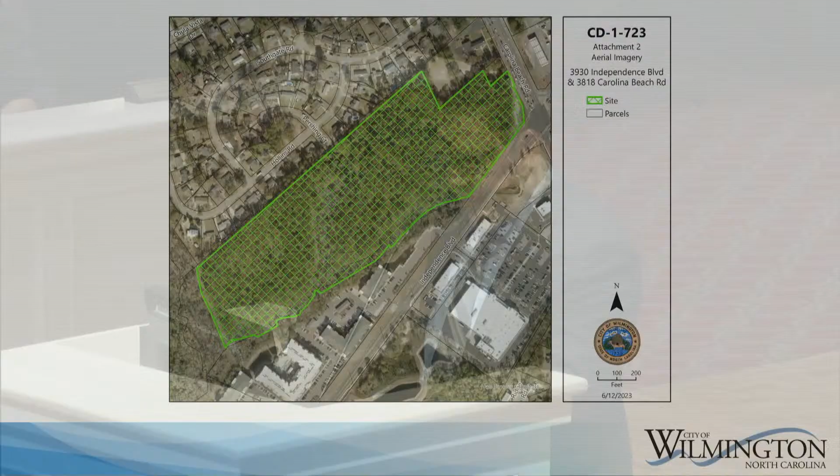Good evening, members of council. This site is located on the north side of Independence Boulevard at its intersection with Carolina Beach Road. It's approximately 23 acres in size and it's currently vacant.

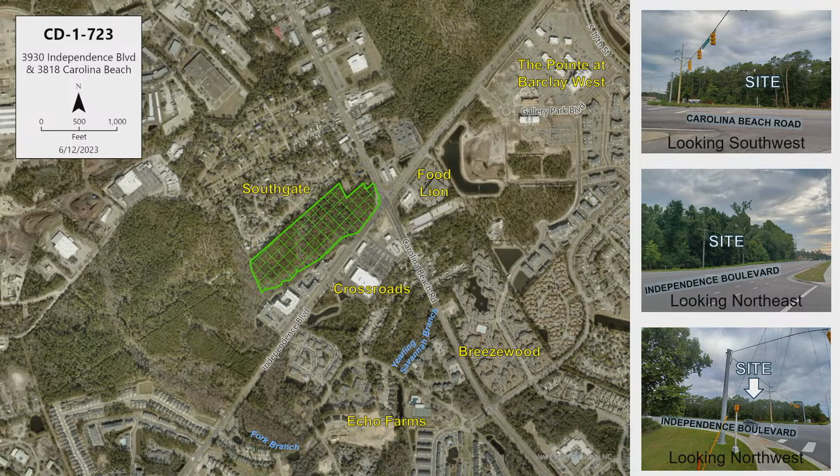The site is surrounded by residential and commercial zoning. A single dwelling neighborhood is located to the north. Multiple dwelling apartments are located directly south, and as I stated, the Crossroads Center is located to the south across Independence Boulevard.

The applicant is proposing to rezone this property to an MD 17 multiple dwelling conditional district for a 257-unit residential development. The project includes 242 apartments located in 5 four-story buildings and 15 townhomes located in 5 two-story buildings. The applicant proposes to construct a new residential collector street off of Independence Boulevard to provide access to the site. The proposal also includes a secondary access on Carolina Beach Road.

Traffic data indicates there would be an increase in estimated vehicle trips compared to the maximum density allowed under current zoning. Based on the estimated trip generation, a traffic impact analysis was required. The improvements agreed upon as part of that process include right-in, right-out driveways at access number 1 and number 2, a westbound right turn lane on Independence Boulevard at access number 1, and upgrading Independence Boulevard to accommodate a safe U-turn movement.

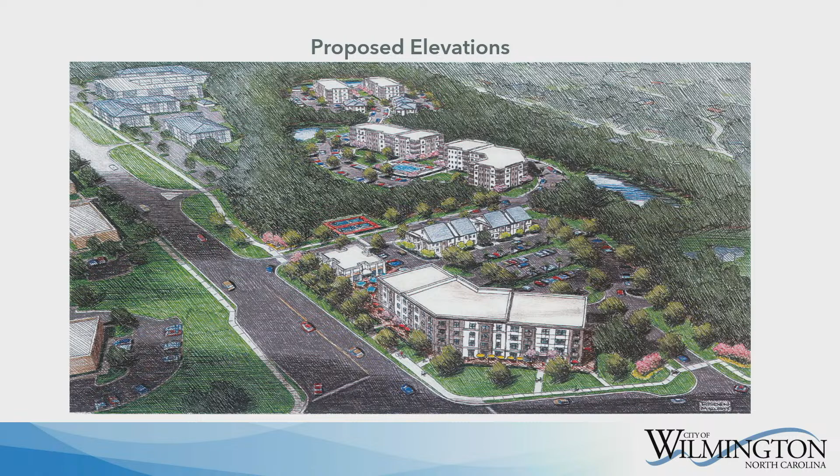The site is located within a greenfield sites as multi-use places area of opportunity. It's located along one of our high-capacity transit routes.

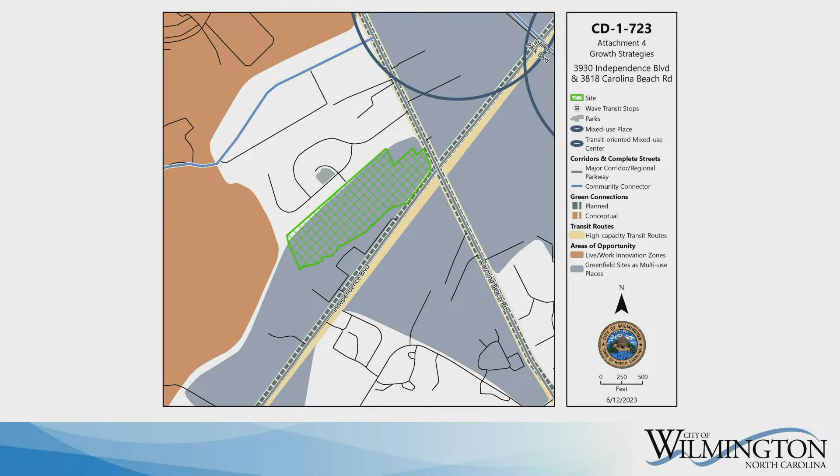The comprehensive plan calls for infill development that maintains and enhances the desired character and increases housing options. The plan calls for new residential development to set aside usable open space that preserves natural landscapes and high-quality ecological resources. And the plan calls for increased density along our transit routes and near commercial services.

This proposed rezoning would allow for quality infill development that is compatible. It provides an increase in density near our services and along the identified transit route and preserves a significant amount of natural area. Staff believes this request is consistent with our comprehensive plan and is reasonable in the public interest, and we are recommending conditional approval.

At the Planning Commission meeting, they voted unanimously to recommend approval of this request. I'd be happy to answer any questions, and I believe the applicant is prepared to make a presentation as well.

Are there any questions for staff? Yes, Mr. Anderson. Brian, couple questions. I guess I'll go short first.

The stub-out thing from the other neighborhood, seems like we've been doing those for a while in different neighborhoods, commercial, different places for later. That bothers me because if we're not going to use them... so why does this one have some issues with wetlands?

Is that the main issue? Well, there is a significant wetland, a significant stream on that side of the property, but the most important thing here is there's a private property located between this site and the neighborhood that cannot be crossed without that owner's approval. They don't have direct access to that stub.

So that line there, those two lines, is that some kind of easement? It's a fee simple parcel. You can kind of see it there between the green and the black lines. Okay, got that.

Can you tell me what improvements to the intersection the applicant is proposing to make? There'll be this U-turn, I guess kind of like a bulb there to make it easier, is that kind of it?

Right now, they're looking at a widening of Independence to accommodate a U-turn at the left turn at the entrance to the crossroads. There's a driveway, the second access to the crossroads, and then there's a driveway to the apartment complex to the north, so that at that intersection is where the widening would occur, and the U-turn movement would be accommodated.

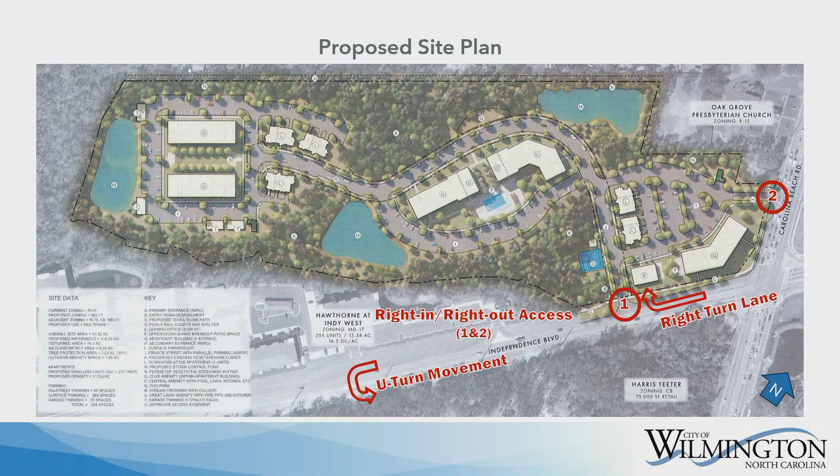And is that advisable without a light, to have all those movements? You're creating an intersection with four directions, right? Yes. And we're just going to have U-turns in the middle of that without any kind of light? There'll be a yield condition, I think. Long-term, we'd like to see a signal there, but I'd have to defer to engineering on those improvements.

Okay, and they're making no improvements to the intersection itself, is that right? Other than widening it and readjusting the left turn to make that U-turn movement. No, I'm talking about up at the main intersection, at Independence and Carolina Beach Road. I believe the pedestrian crosswalks are the improvements they're making there.

They're making one? We have a condition for one, but I think there might be multiple in the TIA that's under review. Okay, and that'll be presented by the TIA by whom? We can confirm that. The city's traffic engineer is here this evening, and the applicant will be able to speak to that as well.

This has been on our radar for some time, and it's real high on our radar now. We've been talking about it a lot lately, what we're going to do with Independence long-term.

Are the trail and the sidewalks that they're building, are they built to accommodate that future improvement, or is it something where it'd just be ripped up? No, they're being located on the edge of the right-of-way to allow for the future improvement to occur.

Okay, same for coming off Carolina Beach. It seems like if you were taking a right, you'd anticipate a right turn lane there at some point, is that? There's a pinch point there at Carolina Beach Road because of those large power poles, so there's not a lot you can do as far as a right turn off of Carolina Beach Road.

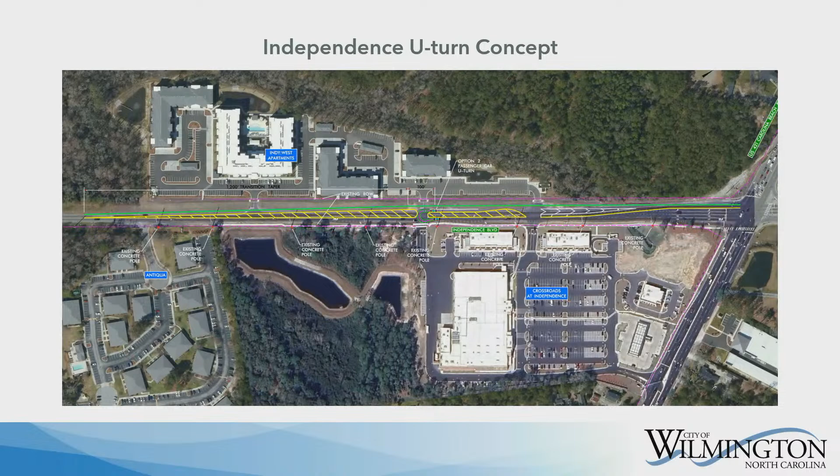Brian, you may have gone over this already. Where's the widening occurring? You said they were widening, it's a right turn and the U-turn? Yeah, I have a slide. This is very preliminary. I can't speak to how this will actually be designed in the end. This is what's being discussed right now for that improvement. Again, this will change, this is just a sketch up to see how it would work. It still has to be finalized through design, but that's generally what it would look like.

Okay, one last thing, I asked you this morning, but the in and out on the right turn in, right turn out onto Independence, you will not be able to take a left there, is that correct? The city, we're going to see to that, is that right? There's going to be a concrete divider as you come out that forces you right. I don't know that it's been determined what will be in the median itself to not allow that to occur, but if that's a condition you'd like to see, then we can make sure there's paddles or some kind of raised median in that location.

Well, I hate paddles, but this reminds me, there's some, you know, at Oleander and Independence there's offices where people try to take a left across the traffic, and it creates wrecks, it creates all kinds of backups. I wish it were somewhere else altogether, further from the intersection, but that close to the intersection, just because it has that V doesn't mean anything. They're going to still take a left. So I'll let the whole board decide if that's a condition, but it's just a question I wanted to ask.

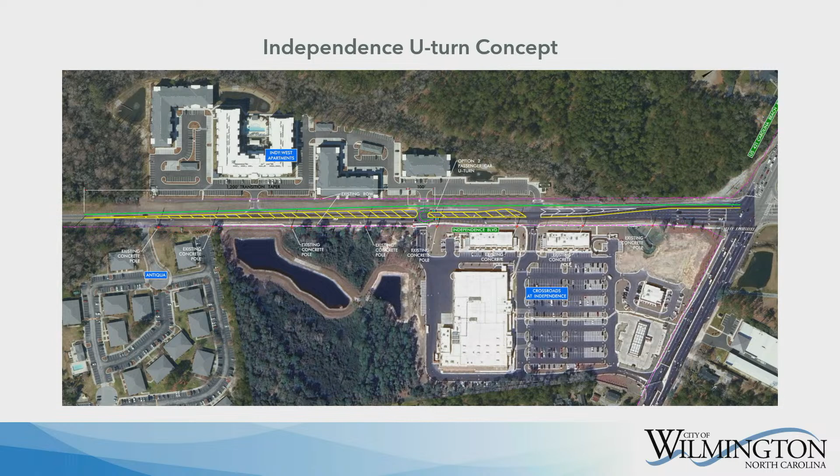Yes, sir. Okay, so from that one up to the U-turn, and I know you said it's temporary, preliminary or not set in stone yet, is that right? Right, this is just a concept they're working on, but there's general agreement that there will be an accommodated U-turn movement. Who is they, the developer? The MPO and the developers. Okay, so the plan for northbound traffic would be to come out of that right in, right out, go to that U-turn, make a U-turn to get back into the queue. Yes, sir.

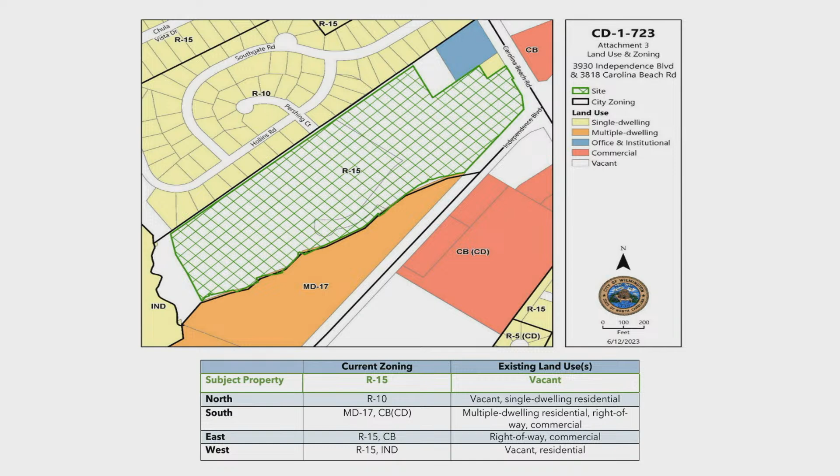These are currently zoned R15. Our request is a conditional rezoning from R15 to an MD17 conditional district.

Here's an overhead view of the location and its close proximity across the street from the existing Crossroads Shopping Center. You can see located to the north, the Southgate Park, a single-family residential community, as well as the Hawthorne at Indy West, an existing MD-17 multifamily development directly below along Independence Boulevard.

Our request is for 242 apartments, a mix of 1, 2, and 3 bedroom units, as well as 15 townhomes, for a total of 257 units. This works out to about 11 units per acre, considerably less than what is allowed under MD-17. The allowable density under MD-17 is approximately 396 units, so this proposal comes in about 139 units less than what would be allowed.

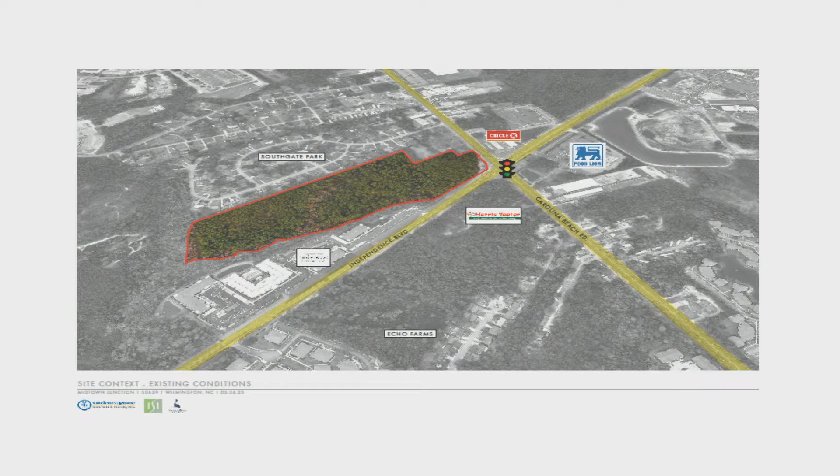The reduced density we're requesting has come about due to some very unique topographical and environmental characteristics of the property. We've laid this out to be sensitive to a considerable amount of wetlands located on these parcels. When you add in the wetlands and tree save, we're looking at approximately 7 of the 23 acres that is undisturbed.

That is by design. We have worked extensively with staff—this is not something thrown together quickly. This design has come about over a period of months, approximately a year of discussions, many different renditions. I feel absolutely confident saying this is a collaborative effort between our development team and the planning staff to do what we felt was best from a design standpoint for this particular property.

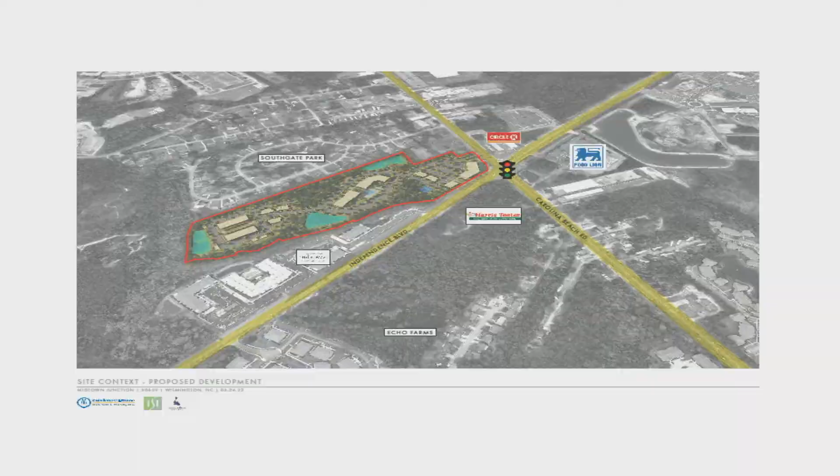Here's a more detailed site aerial of the property. As you can see, we have ingress and egress off Carolina Beach Road and Independence Boulevard. We're hemmed in at that particular spot—there's no other means of ingress and egress at any other point.

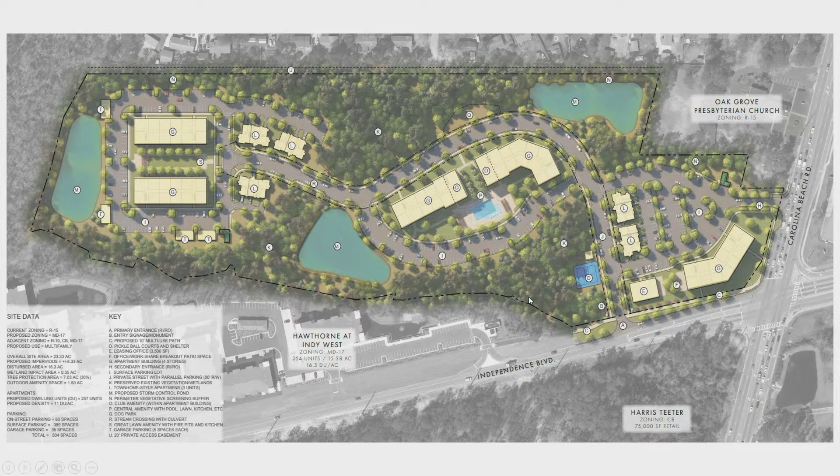It was mentioned by Brian Chambers during his staff presentation that we are stuck trying to go north through Southgate. We are unable to go through Hawthorne at Indy West—at both of those points we have an extensive amount of wetlands. This property is pervasive with wetlands throughout the entire site, so we're working with what we have.

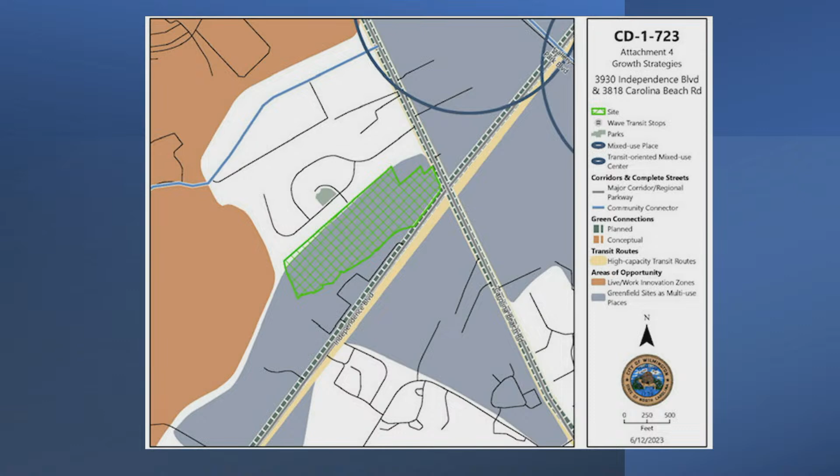We are in the Greenfield site, multi-use place of opportunity as shown on the growth strategies map, as noted in the planning staff's report. We are consistent with adopted plans, whether it's the Create Wilmington Comprehensive Plan, the CAMA Land Use Plan, and some others I'll go into. We also discussed the environmental characteristics and wetlands, and there were some questions by Councilman Anderson about the TIA and some of the improvements that will be required of us along Independence Boulevard to meet traffic considerations.

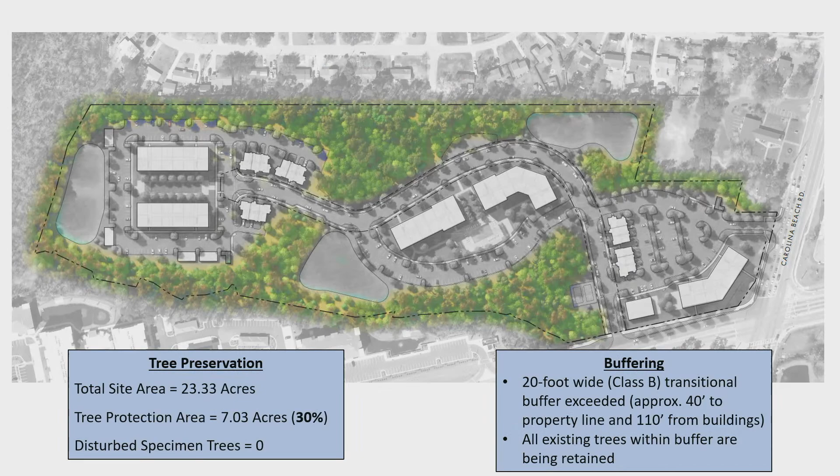Here's just an overview of what we've already talked about as far as environmental and buffering. Again, here are 2 means of ingress and egress. And this was the proposed U-turn design that has been agreed upon by the applicant, WMPO, and the city generally as a concept for how to deal with the traffic on Independence Boulevard.

This is the same schematic that staff pulled up during their presentation in response to the questions by Mr. Anderson. It's obvious this will need to be hashed out during TRC. There are considerable technical issues that will need to be ironed out, but generally this is the concept that we have worked tirelessly on, I can represent to the council, with the city, and we must give credit where credit's due. They have been very, very easy to work with.

We have been able to have a steady stream of communication to work through what is a very complicated issue as far as how we deal with the traffic on Independence Boulevard. Right now, that general design is to have the U-turn located in this particular area across from that Crossroads Shopping Center, down from the ingress and egress to the proposed project on Independence Boulevard, directly in front of that Hawthorne parking lot.

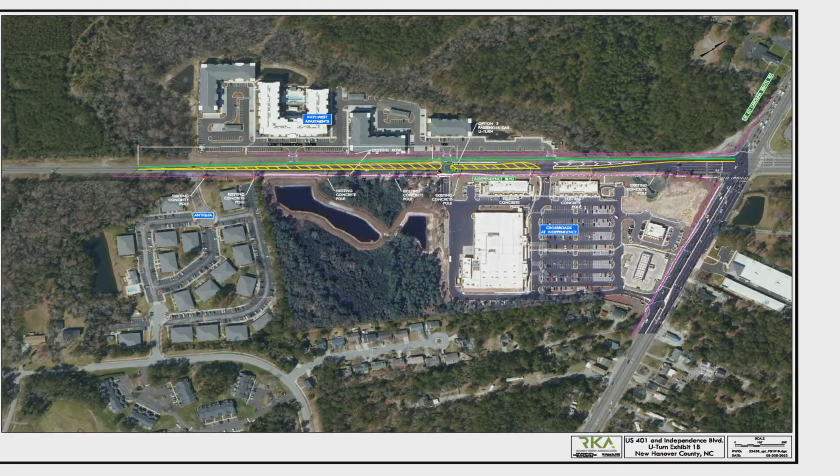Here's an aerial view of that intersection. It's obviously taken some time ago. The Crossroads is not shown on here, it's a giant mound of dirt. Obviously it looks much better now, but it does give a little bit more detail as to how the project would be situated on the corner and where the intersection is currently configured and how that U-turn would be located. Obviously there would need to be some widening and tapering, and some technical issues that would need to be worked out, but this gives some sort of aerial as well as the inlay of the project itself on the site.

I will point out that in order to try to give it more of a commercial feel—this is a residential project that doesn't generally have any commercial components—we have stressed a commercial-like design for that corner piece where it will box in the remainder of the community, and that lower level will be where the leasing offices and some of the other commercial-like operations for the community will be operated, in order to give it a feel of a commercial type development on that particular area. But no, this is a residential project.

As I stated, the CAMA plan, the Walk Wilmington plan, a multi-use path along Independence Boulevard will connect with the existing multi-use path. We'll take into account and work with the city to make sure that we comply and take into account any relocating issues that may come about by the Independence Boulevard widening project when that is funded and designed, and also with the Wilmington, New Hanover County Comprehensive Greenway Plan.

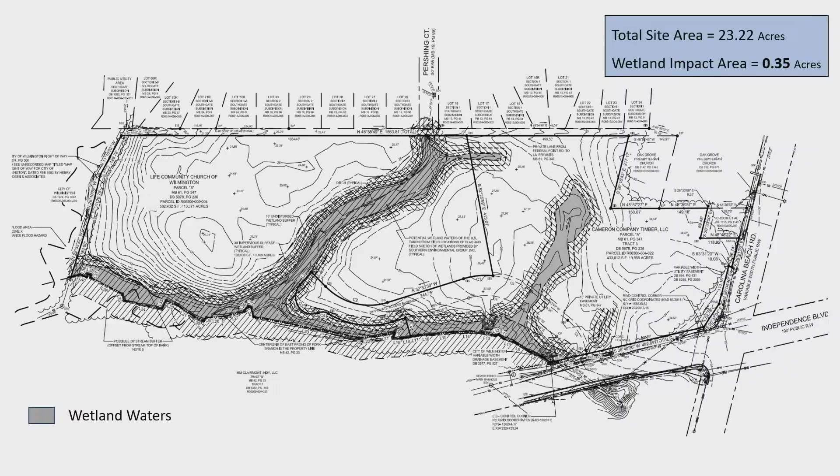Here is the inlay of the site plan itself, and you can see where we've tried to position our buildings, our roadways, the flow of the project itself to take into account those sensitive environmental issues.

And bring us back to our 2 points of ingress and egress, which, regardless of whether or not this is this project or some other project, the only particular way to get in and out is through Carolina Beach Road and Independence. So the issues that we're dealing with are the same issues that any other applicant would face—whether it was the R15 by right that could currently go in there, or some other project—as it stands right now, there's no other way to get in and out. Somebody's going to have to deal with the same issues that we're dealing with, and we're trying to work through those as best we can in a cooperative manner.

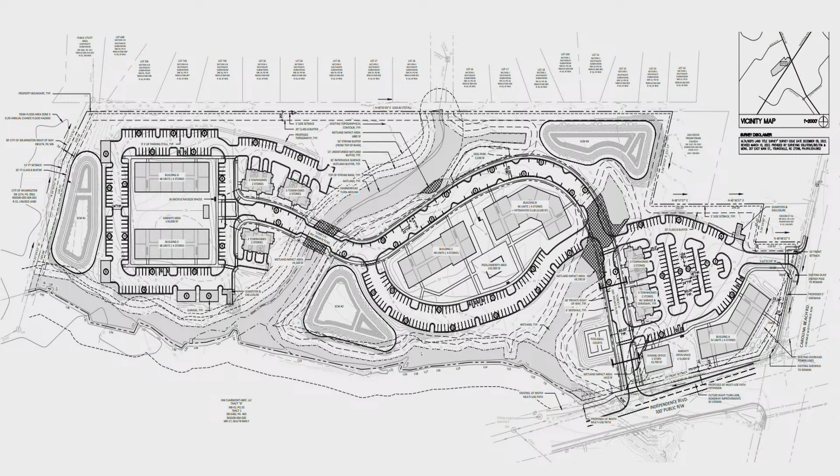At this time, instead of repeating myself over and over again, I know council does have questions. We do have a team here available to answer any questions. I might not be that person, but somebody else is here and could answer any questions council may have for us. Okay, we have a question from Councilman Anderson.

I'm just curious about this Indy West stub, this entrance with Independence Hawthorne, do you have any conversations with them on that, the east end closest to the intersection? So let me talk about how these came about and why this is in our presentation. During both DAC and Planning Board, these were questions raised: can you guys connect to Hollins Road at Southgate? Can you guys connect through Indy West?

So we wanted to make sure we highlighted exactly where those stubs are, and show again here on the site plan where the wetlands are. You can see where the issue is with the little parcel, a strip of land that separates Southgate from our project that we don't have under contract.

There's just a multitude of issues with trying to get through there, beyond whether or not those particular property owners want us to come through. We've heard through our community meetings that Southgate was not interested, and that was the main reason most people showed up to our community meeting, to make sure we weren't connecting through their property. Now again, we couldn't even consider it because of the issues we've already talked about. But my understanding was that brought great relief to those community members that we wouldn't be connecting there. Indy at Hawthorne...

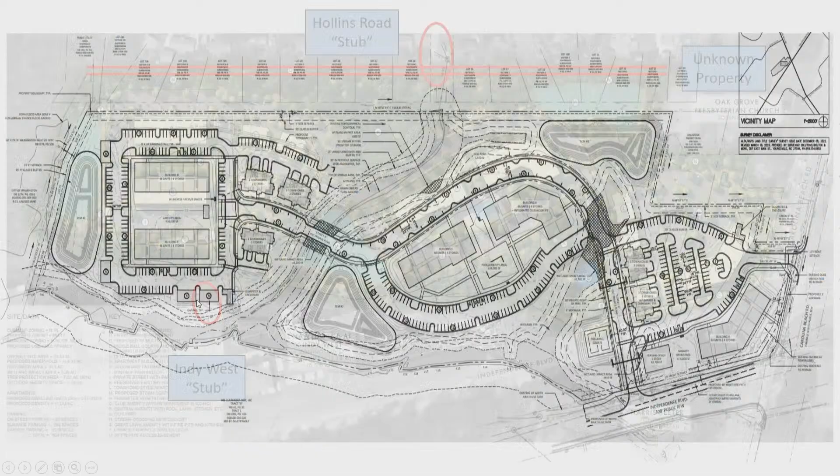Sure, let me see if I have a cursor. I might be able to find a better view. So this one might give you a better idea. If you look where the circle is, it's not a stub, it's more of a turnaround, if that, or just an extension of the parking area.

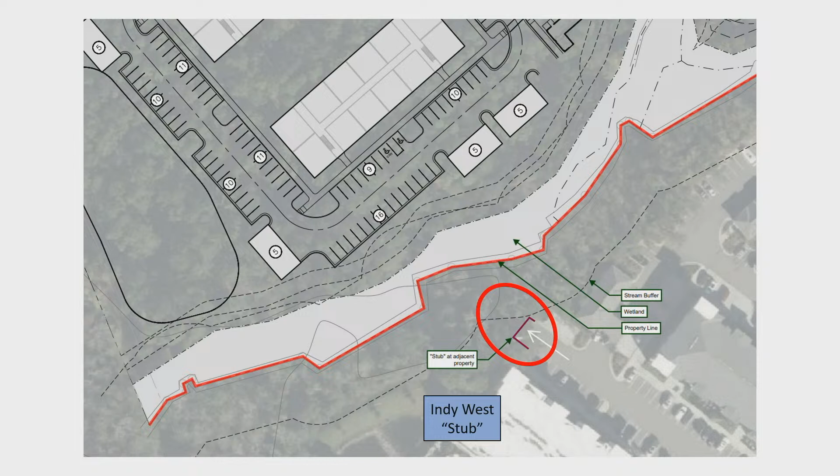But there's considerable wetlands all through from there into our particular site. The logistics of trying to design a way across those wetlands just isn't really possible. I think everything in this project is a trade-off, and that's been the theme for us, that we've worked very hard to be sensitive to different issues as best we can. And here, the environmental concerns are considerable, including in that particular area.

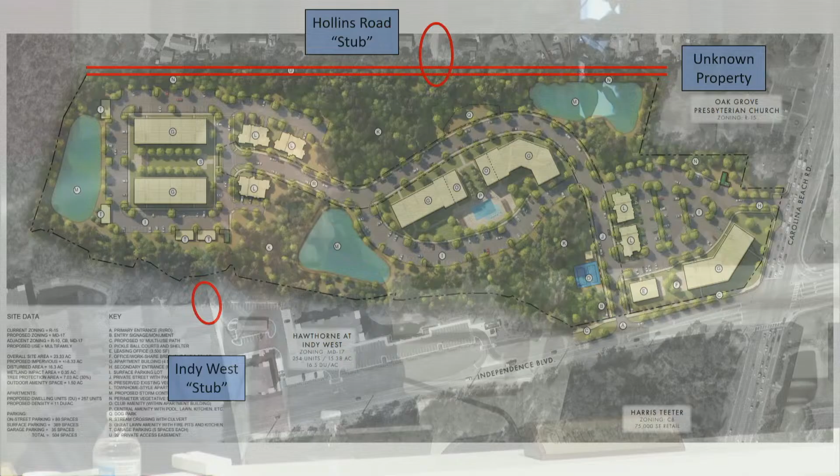You mentioned, could you go back to the aerial that shows the sliver over there by Oak Grove Presbyterian Church? Where is the piece you said you don't have under contract? See the red lines, the two parallel lines at the top? They run across the area in between those two lines. And that's critical to your development? Well, it's not critical to our development, it would be critical if we were trying to connect or could connect up to Southgate. We wouldn't be, right now we can't cross that property, we don't own it or have it under contract.

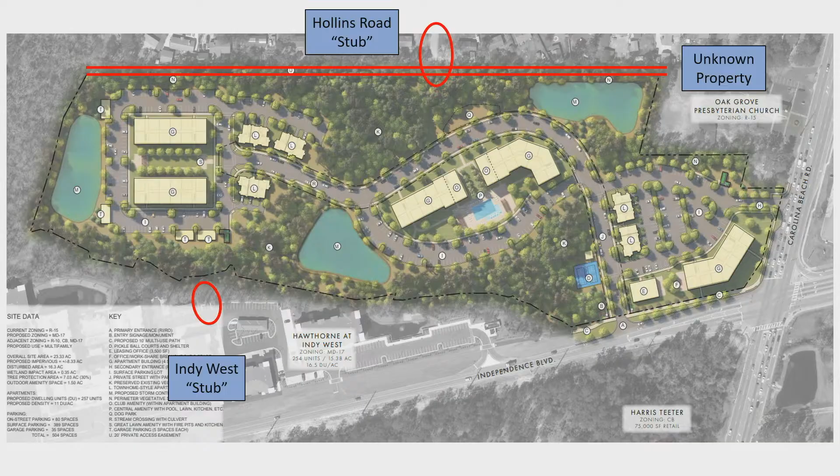Is everything else under contract? Yes, sir, and depending on what happens here tonight or whenever we decide, that's fine. I ask that for good reason, we've gnashed our teeth over projects before, approved them, they go to TRC or whatever, and it drifts away and 2 or 3 years goes by with nothing happening. I'm sure y'all will move as expediently as you can. Yeah, absolutely, as I said before, this has been in the works for a period of years. This is not something, we're not a fly-by-night operation. Mr. Waddell is here and can speak to that more on behalf of the applicant, but it's something we've been working through for a long period of time with staff.

Okay, well perhaps you've got 3 retention ponds there. Are they there because they were required? I know retention ponds take up valuable space, are these there because you've got to have them to cover your percentage of runoff? Yeah absolutely, it's all self-contained. We're going to be required to get the requisite permits through state and local authorities, and we were required to have them. If we didn't need them, we wouldn't put them there. I understand, for sure. But you're not incorporating some of the wetlands into your retention? No, I don't think so, I think that's just all self-contained. Heads nodding back there, I was just making sure. Sure, I understand.

So leading all the way back to this location on the screen as the most logical place to accommodate the U-turn, one of the reasons we like it is it's a 4-leg intersection. But there is a left turn lane at this intersection today, and left turns are being made here that conflict with people coming out of the Indy West or out of Crossroads. So it's not that dissimilar to have a U-turn and a left turn there. There are conflicts there today.

One of the other reasons we like this location is this particular driveway is not set up as the main entrance for Crossroads. The parking, the shops, the buildings are all kind of situated in this area, which means if you're going out Independence, this is more of the primary access point for those retail uses. So this intersection, less traveled, is in relatively close proximity to the right-in, right-out driveway from this development.

You can see some widening there that would need to occur along Independence to make that happen, to make the U-turn happen. One thing I'll point out, another kind of safety feature we'd be adding, is there's no left turn lane currently on Independence going into Indy West. So there's no left turn lane coming from River Road, River Lights, turning left into here. But with the widening we'll be doing, I would fully expect us to be able to stripe in a left turn lane there, even though it's not shown on this drawing. So that's a little bit of the background as to how we arrived at the U-turn at this location and why this concept drawing looks the way it does.

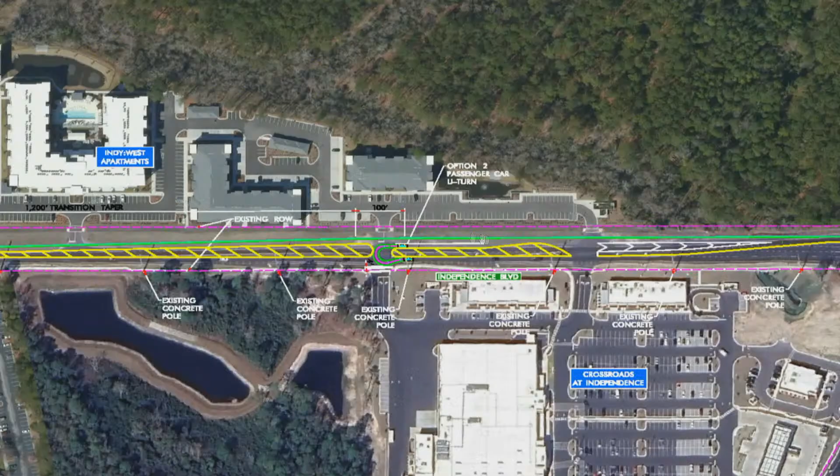The intersection, the driveway that's closest to the intersection, would you put your cursor on that one? That's a full service? Yes, sir. They can go left, right, coming out of there, and people coming down Independence can turn left and get into Crossroads? Yes, sir, that is correct.

And you're now telling me that the one further up where you've got your drawing for the U-turn, that's also full service? Yes, sir. And there's not a stacking — if you were coming down Independence and you wanted to get over on the left side to make that U-turn, right now, presently, there's not a queuing lane or a stacking lane?

There is a left turn lane. You could kind of see it up under this yellow. There is a left turn lane there today to turn left into Crossroads. The reason it's hatched out in yellow is we essentially need to move that over more, move it further north so that we can handle the turnaround for the vehicle here. So that's what the widening is for there. Okay, thank you, sir.

Mr. Anderson: So this is on the total other side of the project, over on Carolina Beach Road. I guess if you're wanting to go downtown or go towards town, north on Carolina Beach, out of this entire project, this is the only way to do it, really, right? Because you come out of Carolina Beach Road, you've got to take a right. There is no U-turn capability at the intersection, is there?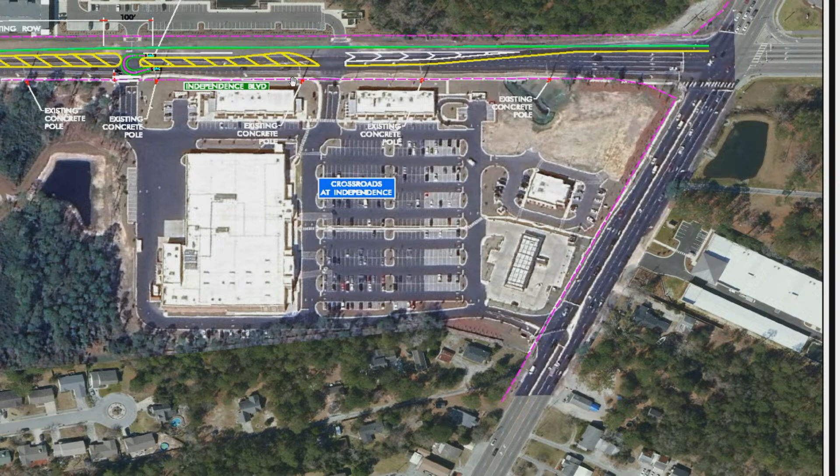We think very little traffic will be making that U-turn movement, but we are looking at that as well. It's not as difficult to make as the one up here on Independence, which is why we've been focused more on it. But that is part of your project to do that? Yes, sir, we are going to be looking at that.

I missed something there, sir. Who are you talking about going down Carolina Beach Road to do a U-turn here? Where were they coming from? If a vehicle comes out of the driveway on Carolina Beach Road and they wish to go back north, kind of back towards town, they could come out here, come through the intersection, and down in this area make a U-turn and come back up.

Okay, now we think very few cars are going to do that, and you can imagine why. It's going to be a little harder to get out on Carolina Beach Road, for one, and you have to travel a much longer distance to make the U-turn. It's not going to be easy during heavy traffic times, and then you have to travel through the intersection down a good ways to make a U-turn and then drive back up. So we think very few cars are going to do that, which is why we're focused on this one, on Independence Boulevard, really designing that so it can accommodate the necessary traffic.

And your TIA bears this out? Yes, sir, that's correct.

So you're saying what they're going to do is come down Carolina, turn right on Independence, and then go to the U-turn here and come back and go back? They could do that. They could come out here, go into the right turn lane and come down to this area and make a U-turn and come back.

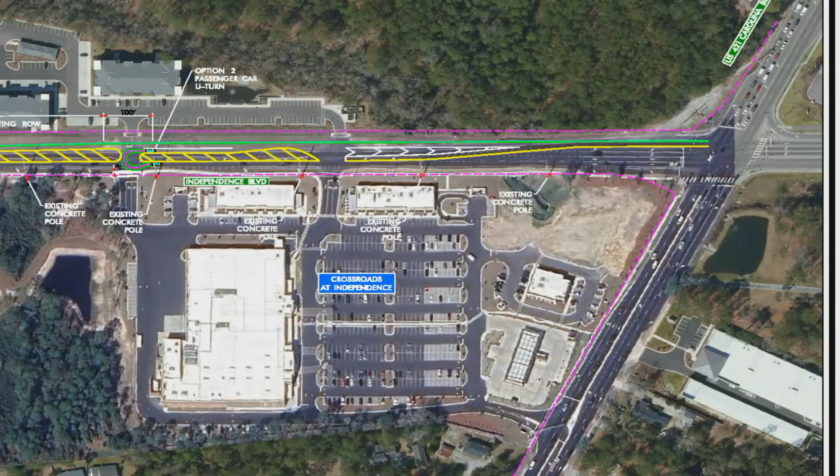And like I said earlier, one of the reasons we like this location is that it's more of a service entrance for the shopping center, so it's a little less travel, fewer cars making that left-hand turn today in there. What does that equate to in respect to cars? How many cars could you stack there if they were coming out? That's roughly anywhere from 10 to maybe 12 cars. All right, yes sir, gotcha.

So Mr. Attenborough, the only people that are, when you think about what I've heard you say, and Colin as well, the only people that are not going to be using that U-turn are somebody that wants to go down Independence to River Road and go north or south. Because if they want to get on Carolina Beach Road, by your own estimate, they're going to have to come out of either of those two right-in, right-outs and go to that U-turn, and then either go back, if they're lucky they can get in the left turn lane and go north toward Wilmington, or they can go south. So that U-turn is critical.

Yes sir, and that's why staff and our team have spent a lot of time looking at this. Normally at this stage we would not even have a drawing like this to really be able to look at, but staff wants to make sure that it works well and we know where we're headed with it. As Collins mentioned, we've worked a lot with staff and the team on this, MPO and city team.

I know that long U-turn drives are not out of the ordinary on Market Street. They're going to be, you know, a quarter mile, come out and have to go a mile this way to go back that way. Same thing, and I get that. Yes sir, there probably should have been a light planned by Crossroads, because Independence Boulevard is going to continue to be impactful. Yes sir.

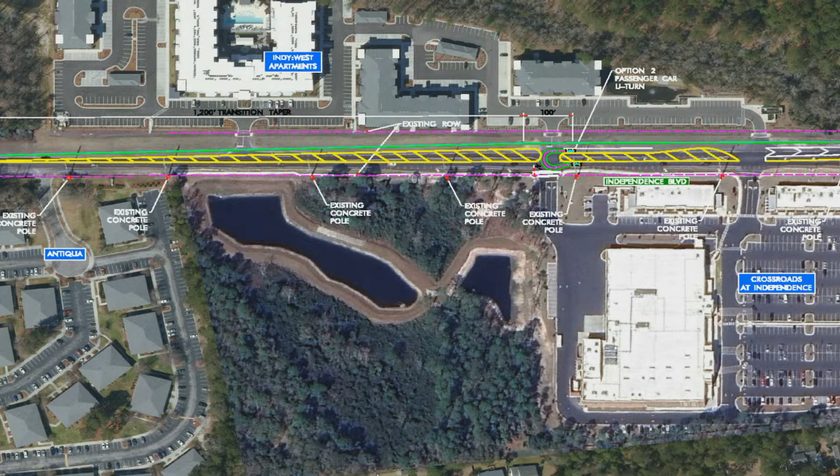Thank you. Yes, sir. Ms. Anderson?

Brian, you mentioned Chambers - you did mention at some point in your presentation that would be a likely spot for a light in a future redo of Independence. Is that just from the hip, or is there some thought behind that with MPO or engineering?

In the discussions I've been involved with engineering - and they're here to correct me if I'm wrong - as part of that Independence widening, a light would be strongly considered for that location. That hasn't been designed, but that's what I've been told would be the preferred location for a light. I would presume at that point we probably don't have a full intersection at the one you currently point out as being where all the action is, because that would be so close to the intersection that's no longer right - that four-way. The light in that location would be too close to the intersection.

Right, so okay, that makes sense. Thank you. Anybody else? Okay, thank you.

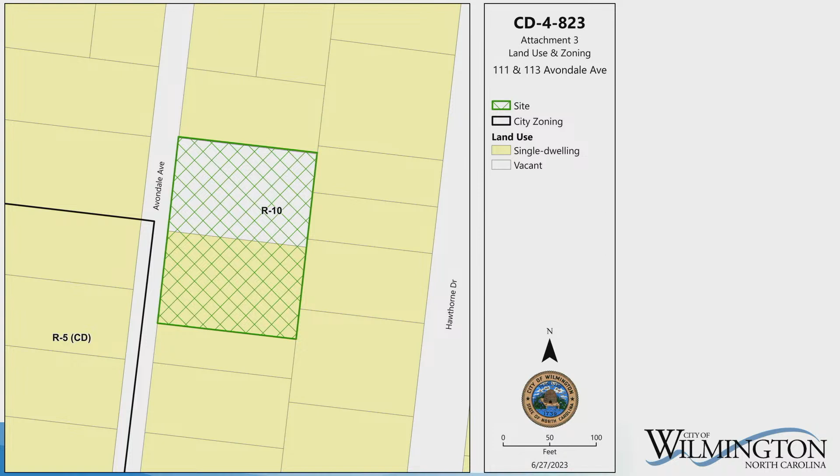The applicant proposes to rezone the subject site from R10 Medium Density Single Dwelling District to R5CD Medium Density Mixed Residential Conditional District for a 4-lot residential subdivision totaling 4 units: 2 existing single-family dwelling units and 2 proposed single-family dwelling units. The 2 existing units are currently located on 1 lot, and the rezoning and subdivision would remove this non-conforming situation, bringing the lot into compliance with the Land Development Code.

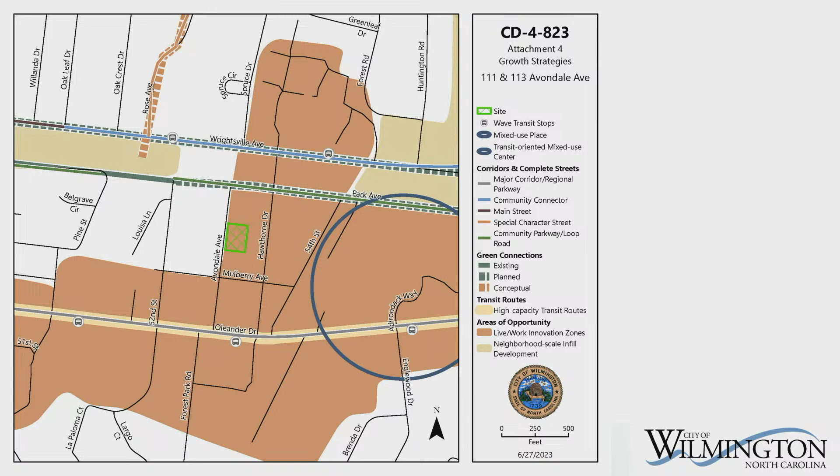The site is located within the areas of opportunity, live, work, innovation. The comprehensive plan supports quality design and site planning so that new development, infill, and redevelopment is implemented with minimal adverse impacts on the desired character of the existing built environment. The proposal increases the housing supply while protecting the desired neighborhood character through infill development.

Staff believes the proposed zoning amendment is consistent with the recommendations of the Create Wilmington Comprehensive Plan and that the request is reasonable and in the public's interest. Staff recommends conditional approval with the conditions listed in the case summary. The Planning Commission voted unanimously for approval at the August 2nd meeting.

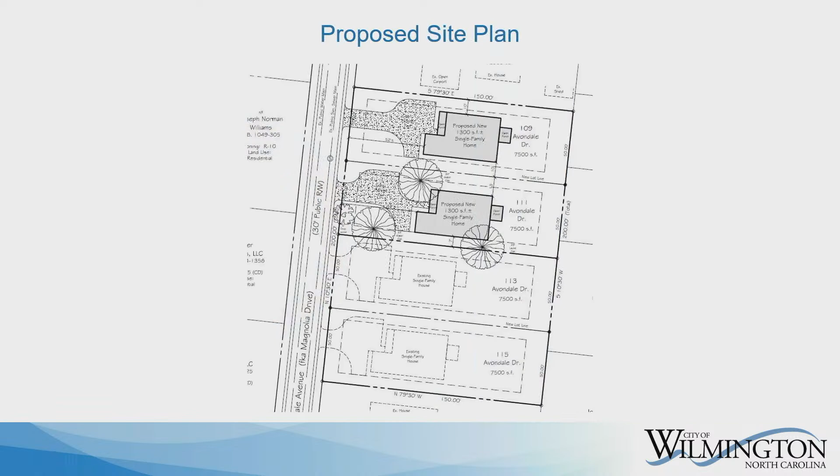This concludes staff's presentation. I'm happy to answer any questions, and the applicant is here as well. Are there any questions for staff? Seeing none, thank you so much.

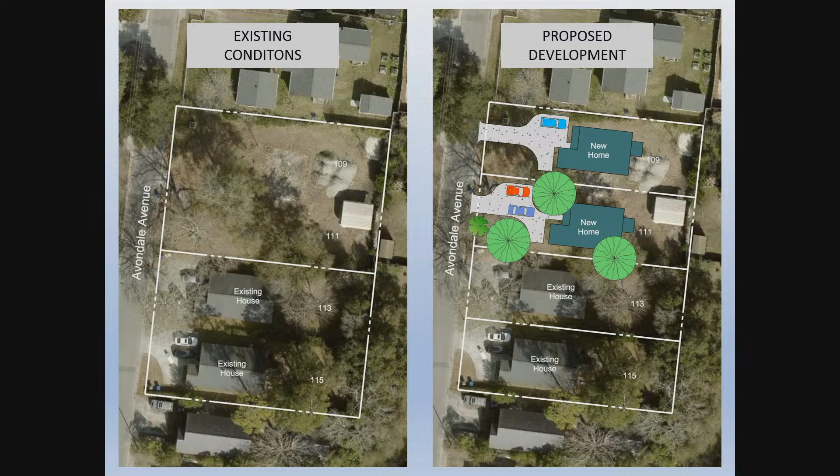What we've got now are the 2 existing houses, and as Abby pointed out, there was some type of snafu, so to a certain extent this is somewhat of a housekeeping process also. There are 2 primary residences on a single lot. Back in 2017, I don't know what exactly occurred. They're addressed, they're there, but they shouldn't both be on the same lot. So this would remedy that situation, and it would also allow the lot north of it to be subdivided into 2 50-foot wide lots, allowing construction of 2 new homes.

This is not only our architectural proposal, but the 2 homes that are existing are these 2 homes. They are single story, with parking in the front - this is the architecture. The only comments I got, primarily in the neighborhood when we had our meeting, was that the people behind these lots did not want 2-story structures. So as far as the neighborhood character and fabric, what we're proposing would duplicate what is already there and is consistent with most of the rest of the neighborhood.

I don't need to tell everyone what we talk about every meeting these days - the need for housing and affordable housing - and allowing additional density is one of those methods of providing more affordable housing. We believe this is consistent, as staff has pointed out. We hope you will agree with the Planning Commission's unanimous recommendation that this infill would be implemented with minimal adverse impacts to the character of the neighborhood. Infill should be developed in a manner consistent with that neighborhood character, and location-efficient housing should be promoted and encouraged for sustainability of our city. Thank you.

Thank you. Are there any questions for Ms. Wolf? Yeah, quick statement, Mr. Barnett - will the 2 new houses look like the 2 existing houses?

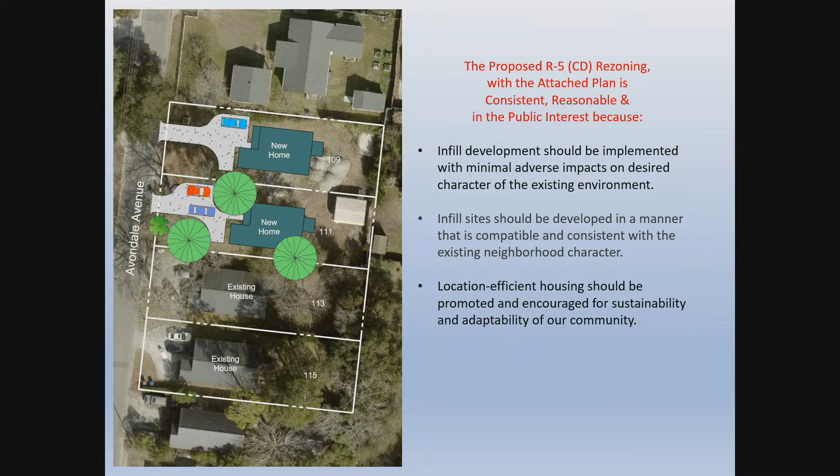We've tried to remedy all the comments we heard. One of the conditions is that we're not asking for the ability to have accessory dwellings either. So, 2 new homes and 2 existing homes remain and become conforming. Okay, thank you. Any other questions or concerns? Great, thank you very much.

At this time, I'll open the public hearing and ask if anyone would like to come forward to speak either in favor of or opposed to this proposal. The public hearing is now open if anyone would like to come forward. Seeing none, I will ask the clerk if she has received anything.

Yes, ma'am, Mayor Pro Tem. We received one from Jamie Price of 5210 Park Avenue: 'I am against rezoning this property. I live around the block from it. Avondale suffers from drug trade, domestic violence, and crime. Multiple unit dwellings will not help this situation. Single-family dwellings may.' Thank you.

And that's it. The public hearing is still open if anyone wishes to come forward, either for or against. We're happy to hear you. Any questions from council? If not, I will close the public hearing and ask for the wishes of council.

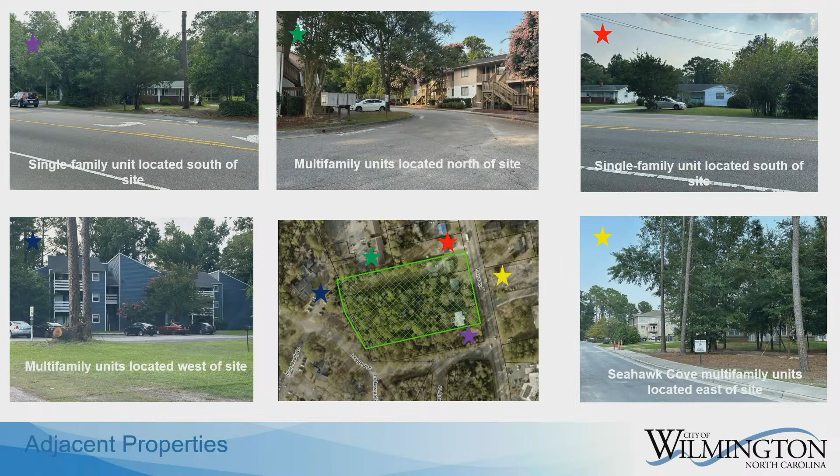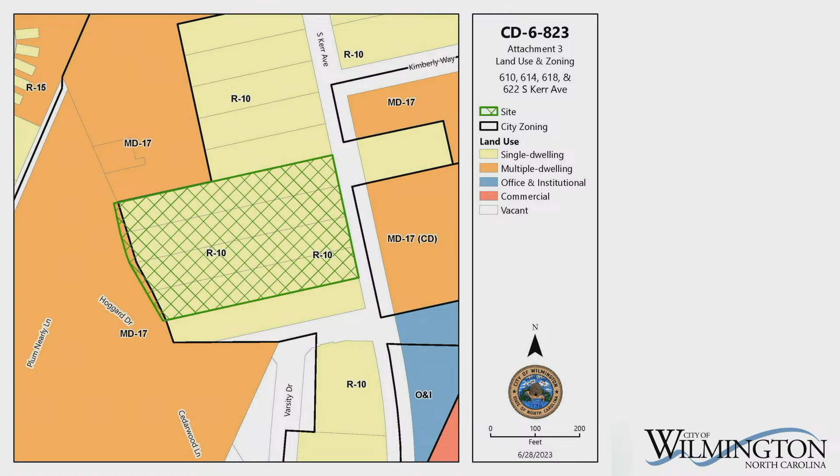This area of the city is in transition, as witnessed by the variety of zoning and land uses in the vicinity. The request before you this evening is to rezone the subject site from R10 Medium Density Single Dwelling District to MD17 Conditional District, High Density Multiple Dwelling Residential Conditional District for a 49-unit residential development. The project includes 2 3-story buildings containing 24 units each and 1 1-story single dwelling home. A full access driveway is proposed off of South Kerr Avenue.

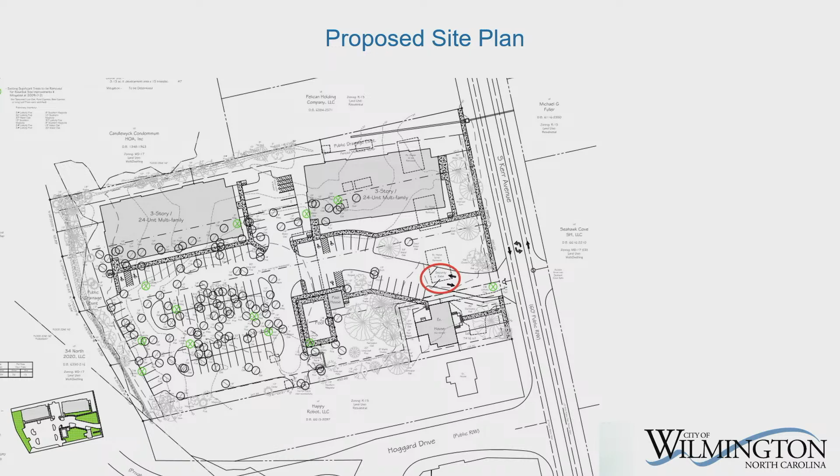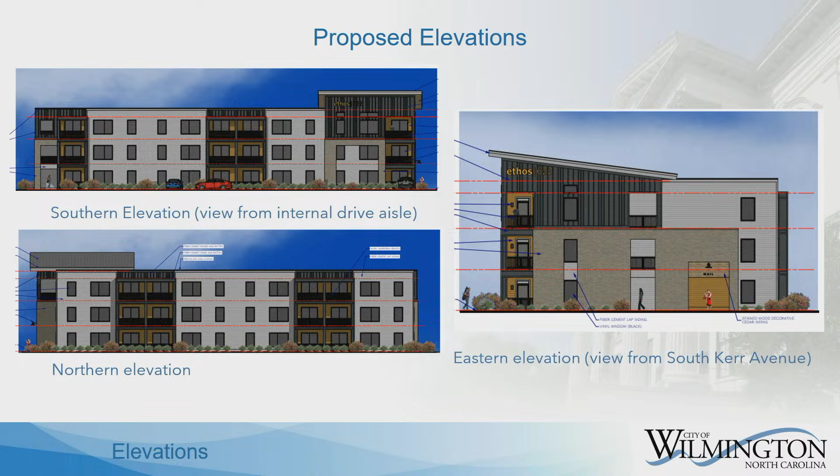The applicant is preserving 21.3% of the property to open space, exceeding the required 20% of the MD17 zoning district. The elevations provided by the applicant are shown on your screen. The eastern elevation on the right is the anticipated visibility from South Kerr Avenue. The southern and northern elevations are also included on the left side of your screen.

The comprehensive plan identifies this site as within an employment academic center and live-work innovation zone area of opportunity, and along a major corridor and regional parkway. Areas well suited for infill development should increase densities with infill development, including mid-rise buildings, parking decks, and other urban solutions. The proposed rezoning would allow context-sensitive infill development that is compatible with the existing neighborhood.

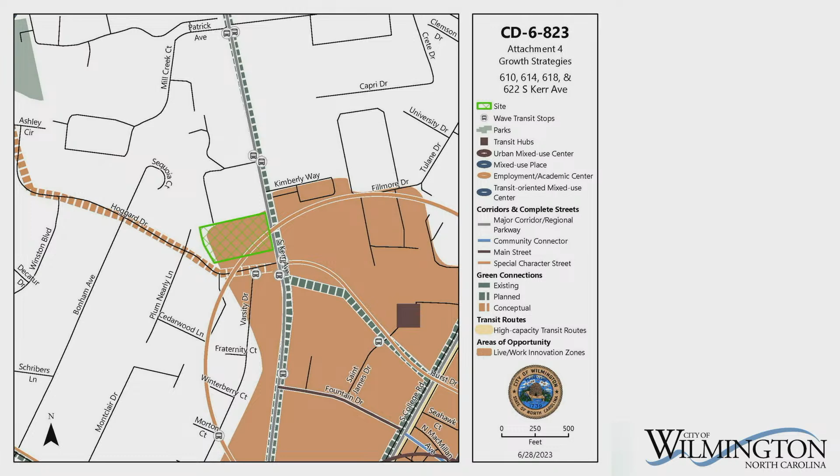Based on the information contained in the case summary, as well as the Create Wilmington Comprehensive Plan, staff believes the request is reasonable and in the public interest, and recommends conditional approval with the conditions outlined in the case summary. The Planning Commission held a legislative hearing regarding this matter on August 2nd. No public comments were received at that hearing or via the online platform in advance of the meeting. After discussion, the Commission voted unanimously in favor of recommending conditional approval with the conditions outlined in the case summary. That concludes staff's presentation. I'm happy to answer any questions you may have.

The applicant is also available with a presentation. Are there any questions?

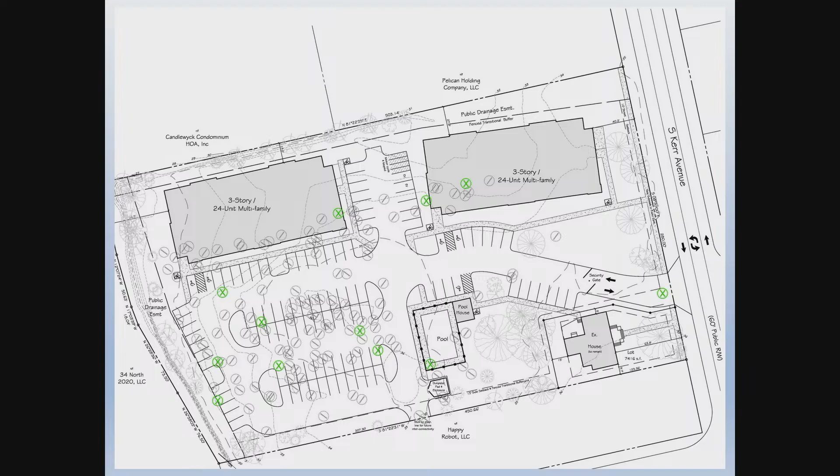So just a little bit more decorative view of the site plan. And again, the architecture - his architect took a lot of time with these and meeting the criteria now of the multi-dwelling districts as far as addressing all streets, keeping parking off of the street facades, and just creating an attractive architecture.

With that, we believe this is consistent, reasonable, and in the public interest because the proposed plan does provide for a compact pattern of development that reinforces the efficient provision of public services and utilities. The plan is context-sensitive infill that's compatible with the neighborhood and the other multifamily developments around it, and location-efficient housing that has access to public transportation and alternative means of traverse like the bike lanes and the trails that are getting closer to these areas all the time, which is encouraged for sustainability and adaptability of our community.

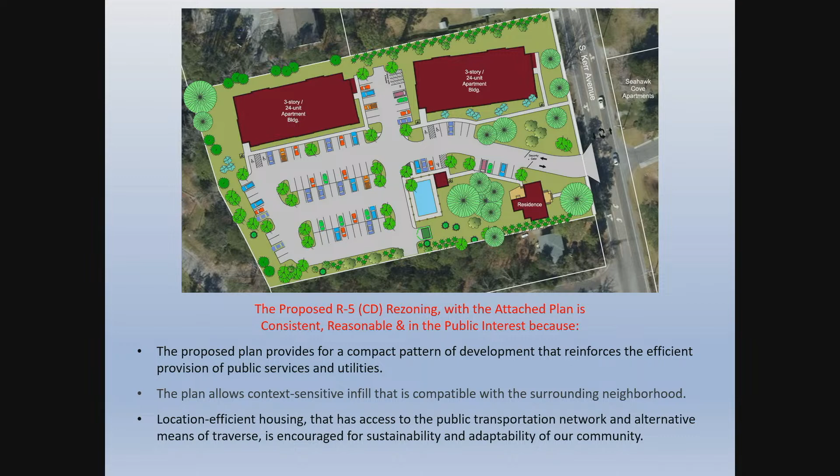I'd be happy to answer any questions.

Ms. Anderson asked: Cindy, the facade that you'll see from the road is which one? That is the lower one on this scene. There are windows, changes in materials, fenestration, and this is very unusual as far as the typical three-story walk-up. These are three-story buildings, but laid out differently than what we commonly see. You go up the middle, go right or left, and up the stairs. There is a mail kiosk at the end for each of the buildings, and that's where the lady in red is standing.

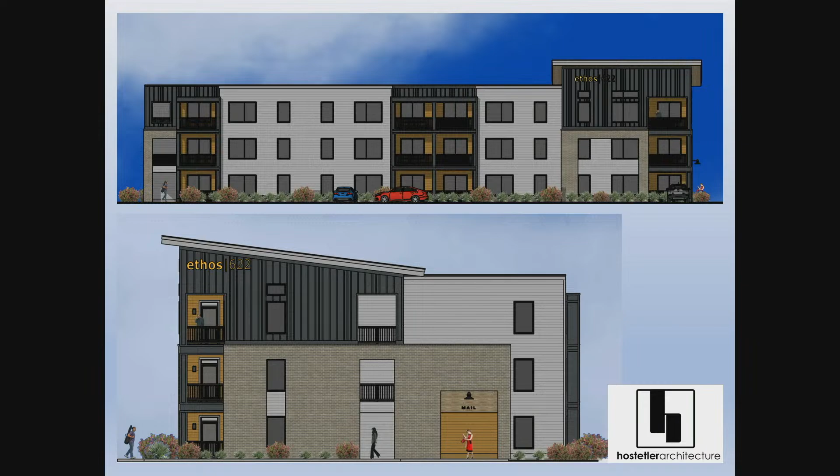These are basically built for college kids? No, any apartments are available to whomever is able to rent them. These are all two-bedroom units, which is not typically as marketable to college students, so that is not the marketing demographic intended. Okay, and you said they're three-story walk-ups, so no elevator? Correct, three-story walk-ups, no elevators, just a different type of layout than we typically see with most three-story walk-ups with 24 units in them. It's longer and leaner, with four different sides.

Ms. Spears asked: Now Cindy, in the last project you mentioned affordability. You did not mention affordability with this project. This is a market rate project. It has amenities, and it's intended to be a little bit more secure, since safety has become a real concern for everyone. Thank you.

Mr. Waddell asked, out of curiosity: the single-family residence, that's unique, never seen one of those. Will it be part of the overall project? We at first intended it to maybe be a clubhouse, but an existing building has inherent problems and costs due to accessibility. So it's an existing structure, already rented, but recently renovated, so money has already been put into it. Rather than tear it down, this works well because you can still have a single family home in the multi-dwelling district as long as it's on its own lot. We've shown that on the more detailed plans. That's neat, thank you.

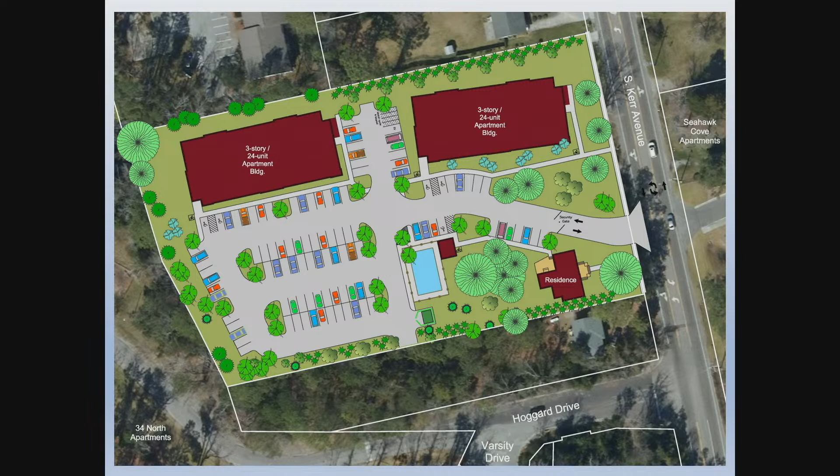Mr. Anderson said: in our packet it still has clubhouse on it. That had not been updated. So you're taking out the parking for that house, right? That's correct, the parking for this residence will have to be internal to the plan. And the number of parking spaces did not change from the clubhouse plan, right? No, it did not. Do you have enough parking? Yes, there are 48 units, which requires 96 parking spaces, and I believe we have 105. How many bedrooms is the single-family house? Two bedrooms, so 96 bedrooms total, 96 parking spaces required. Okay, thank you.

Anybody else? Thank you, sir. This time I open up the public hearing and ask if anybody in the public wishes to speak on item PH3.

Please come forward, sir. Good evening. I'm against this for several reasons.

One reason is the fact that there are a lot of trees in this lot. There's only 10% tree cover left in the city, and to me that's an environmental issue. We need trees to breathe, for clean air and so forth. So why tear down these trees to build more apartments?

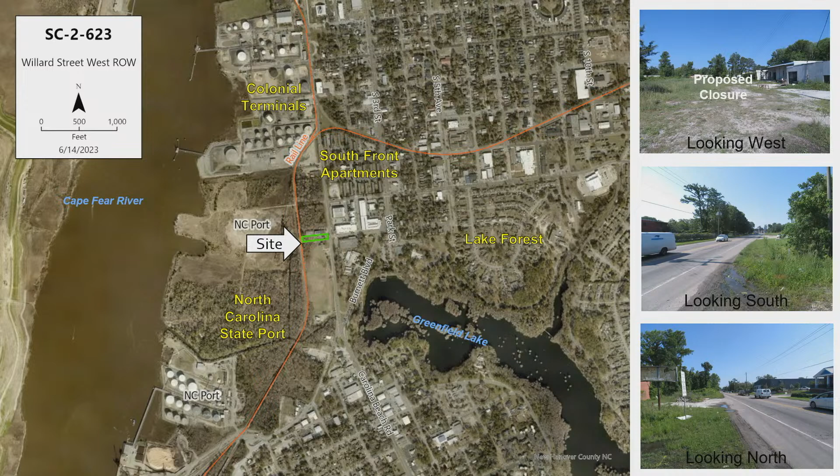Good evening again. The request is to close a portion of the Willard Street right-of-way located west of South Front Street. This right-of-way is currently unimproved. This map shows the right-of-way in the context of the surrounding area, and there are also several photos of the property. The site is currently zoned IND General Industry and R5 Medium Density Mixed Residential District. If the closure is approved, the request will add additional lot area to 4 adjacent parcels.

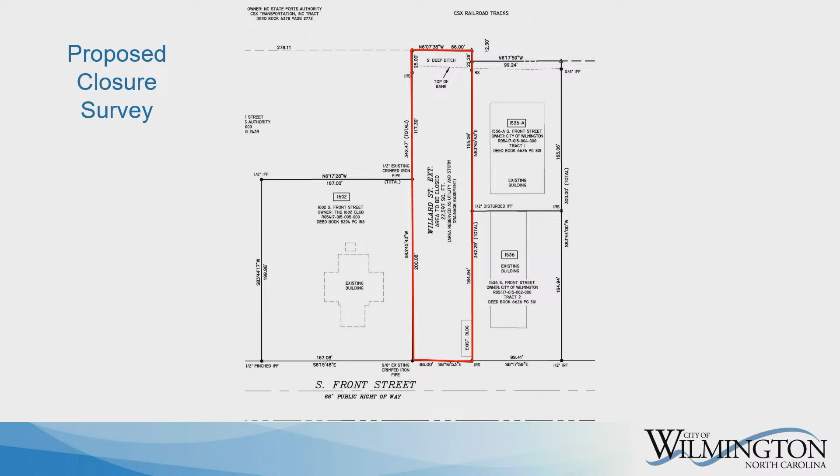The right-of-way terminates at an active railroad right-of-way adjacent to the state port, so there's no potential to extend Willard Street to the west. The requested closure would allow this area to be included in the future development of the adjacent sites. Staff believes this request would not have an adverse impact on our road network, is reasonable in the public interest, and recommends approval. The Planning Commission voted unanimously to recommend approval as well. Staff is the applicant, so any questions you have, I'm happy to answer.

Any further questions? Thank you, sir. I'm going to open up the public hearing and ask for the wishes of the public if they want to come forward and speak on this item. Seeing none, are there any, Madam Clerk, have you received any additional commentary?

I'm going to close the public hearing and ask for the wishes of council in respect to the closure. We have a motion to approve by Councilmember Spears, seconded by Councilmember Anderson. Discussion. All in favor of that motion, please indicate by saying aye. Any opposed? That item passes unanimously on first reading.

Is there a motion to waive second reading? Motion made by Councilman Rivenbark, second by Mayor Pro Tem Haynes. Discussion. All in favor of that motion, please indicate by saying aye. Any opposed? Item passes unanimously on first as well as second reading.

That brings us to our next item of business, item PH5, which is an ordinance for the closure of a portion of Martin Street, a 66-foot wide unimproved right-of-way located west of South Front Street to its terminus, with a total length of approximately 320 feet, consisting of plus or minus 0.47 acres of land. I'll recognize our city manager, Mr. Caudle. And again, Mr. Mayor, Mr. Chambers will overview this item for us.

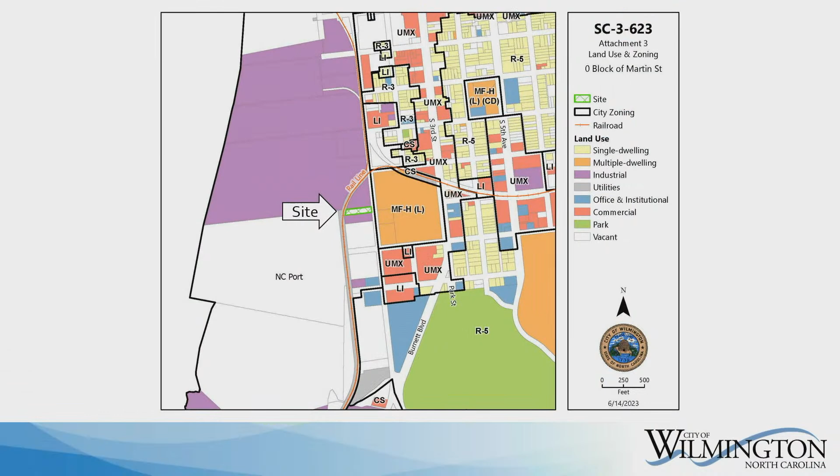This is going to be eerily similar to the one you just heard. This is generally in the same area, except this will be the eastern portion of Martin Street. Again, this one is unimproved as well. There's another context map and some photos of the subject property, Martin Street. This site is zoned general industry, and the adjacent properties are also zoned for general industry. This would add lot area to 2 adjacent lots.

The right-of-way terminates again at a railroad right-of-way adjacent to the port, so there's no potential for the Martin Street right-of-way to be extended to the west. Again, this closure would allow the site to be included in the future redevelopment of adjacent properties. Staff believes the request will not have an adverse impact on the road network, is reasonable in the public interest, and recommends approval. The Planning Commission also voted unanimously to recommend approval of this one.

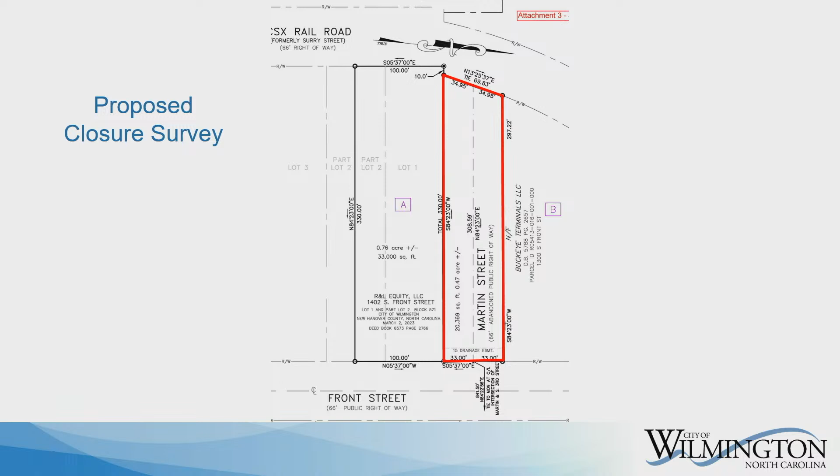Staff is not the applicant on this one. I wasn't able to notice whether the applicant is here tonight. When I looked out in the crowd, he might be here or not. If he's not, I apologize for that, but I'll be happy to answer any questions you might have. Any questions for Brian? Okay, thank you. Is the applicant in the audience?

Good evening, Council. Thank you for letting me be up here. I do own the property at 1402 South Front Street and have owned that welding and fabrication company located there for 7 years, rented it for a few years prior to buying the property. With all businesses, we have growing pains, so I started this application back in April to gain that little bit of area right there where we actually park our trucks. We park county school buses when we repair seats and so forth for them, city trash trucks, equipment trailers come in all the time, and we've been using that 66 feet with our neighbor to the north, Buckeye Terminal. We've worked that out where we've fenced it in and have been maintaining it and keeping it looking nice and secure for our equipment vehicles. So hopefully we can use that to grow a little bit in the future. Thank you, sir.

I'm going to open up the public hearing and ask if anyone in the public wishes to speak on this item. Seeing none, are there any additional comments that you've received, Madam Clerk? Okay, very good. I'm going to close the public hearing and ask for the wishes of council.